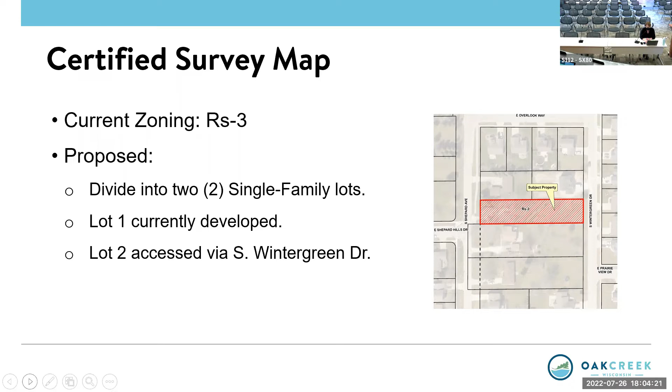On the screen right now is the proposed certified survey map showing the dividing line, creating 2 exactly equal lots. You'll notice that Lot 2 includes a building envelope. Staff is recommending that the building envelope be removed, simply because we do not know whether or not those particular setbacks are going to apply to any particular development.

At the time it becomes ready for development, it would have to comply with whatever code requirements are in place at the time. So whether it's the principal structure or any accessory structures, that 10-foot setback on either side may or may not be relevant. However, the 30-foot setback will still be relevant, so we're requesting that the 30-foot setback to Wintergreen Drive remain, but the remaining building envelope just be removed.

As a point of reference, laterals will need to be extended to serve Lot 2, and a grading plan will also be required at the time of a building permit application submitted for development of Lot 2. With that in mind, there is a suggested motion for approval for Plan Commission consideration on the screen.

The applicant is in attendance. He indicated prior to the meeting that he would wait for any questions from the commission, so we'll go right to the commission. Any questions or concerns, starting on my left with Commissioner Hannah?

Yes, I have a question. So when we divide that lot from Wintergreen Drive, are there going to be any laterals for sewer, sanitary, any utilities? Yeah, they'll have to be extended to serve the property. So there will be work on that Wintergreen Drive, right? There won't be any main required, but laterals will have to be extended to serve the lot on Wintergreen, yeah.

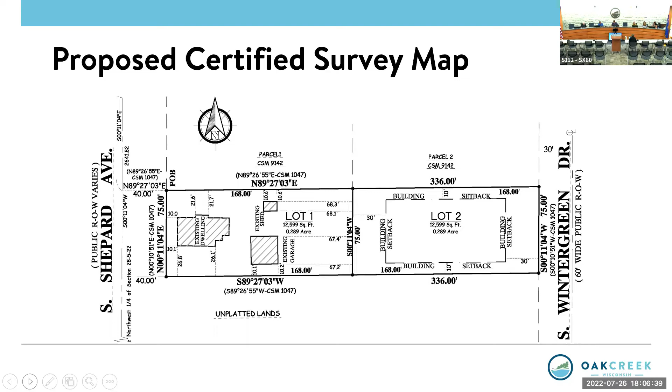Questions, please? Nothing from engineering, thank you. None for me, no questions. And I have no questions or anything to add.

So we will look for a motion on item 7A. Super moves that the planning commission recommends to the common council that the certified survey map submitted by Daniel Katona for the property at 9630 South Shepard Avenue be approved with the following conditions: one, that the map is revised to remove the building envelope and zoning district setback; the front setback of 30 feet shall remain on the map; that all technical corrections, including but not limited to spelling errors, minor coordinate geometry corrections, and corrections required for compliance with the municipal code and Wisconsin statutes are made prior to recording.

Kuzikowski will second. Roll call beginning with Commissioner Perillo. Perillo, aye. Kaczynski, aye. Lorik, aye. Kuzikowski, aye. Seifert, aye. And I, aye.

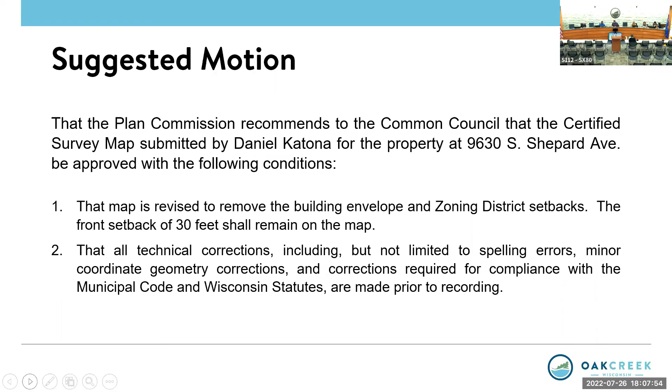That gets us to item 7B, plan review: review of site, building, and related plans submitted by Brianna Bradford, Pilot Travel Centers, for modifications to the exterior of the building at 2031 West Ryan Road.

Thank you, Mr. Chairman. This is for the Pilot Travel Center, the existing gas station, truck stop, and related facilities. There are various zoning districts that affect the property, but the part of the parcel we are actually concerned with this evening is really just the building and the trash enclosure.

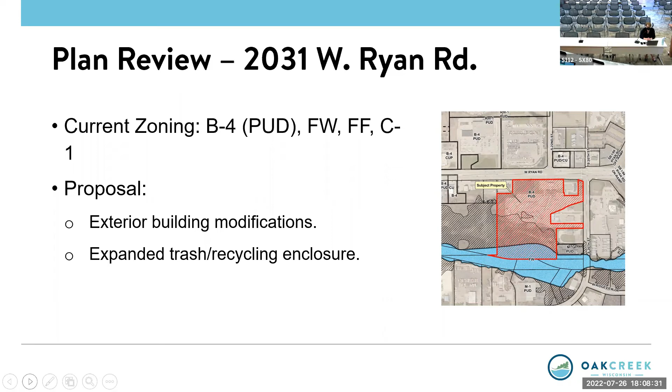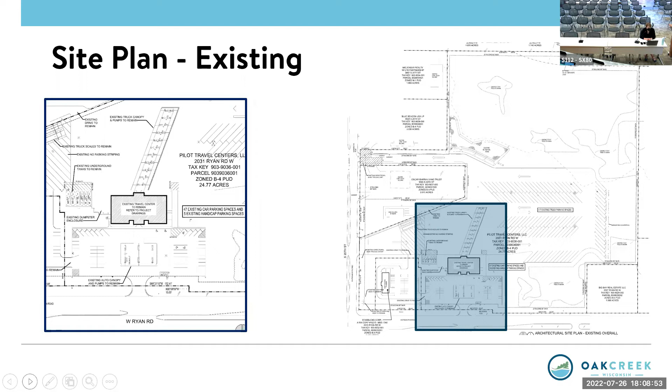On the screen right now is the existing site plan with one caveat: it is missing some of the parking and the LNG addition that was approved in 2012, but that's not in the area we're discussing this evening. Again, this covers exterior modifications to the building and expansion of the existing trash enclosure. This is the proposed site plan for that area. The trash enclosure is on the west side of the building, and the expansion will go a little bit more west and south.

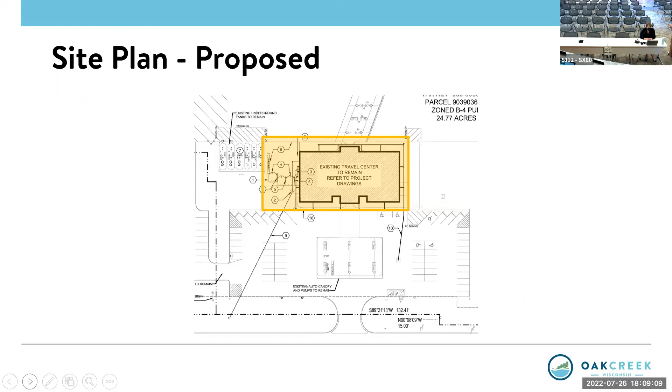The trash enclosure itself is proposed to be constructed with similar materials to the building, split face CMU in a color to match. The gates are about 7 feet tall, corrugated metal, which is acceptable per code. There are two personnel gates proposed to be about 8 feet tall and a little more than 3.5 feet wide, proposed to be chain link. Staff is recommending approval even though chain link is not an approved material for trash enclosure gates, because they're just for personnel access, not the main gate portion.

Within the enclosure itself, there are a couple of items of interest. Instead of traditional dumpsters, we are proposing to have a trash compactor and potentially a cardboard baler. Staff have no concerns for either one of those. However, we do have a concern for the proposed storage container. Outdoor storage is actually a conditional use in the B4 district, and because this is subject to historic planned unit development agreements, it may be prohibited altogether. Unfortunately, staff, in researching the historic PUD documents affecting this area, were unable to determine exactly which PUD or PUDs would apply, so we are just applying the code section here, and we're recommending that the storage container be removed right now. If in the future they do request that, it would at least require a conditional use permit, if it would be allowed by the PUD at all.

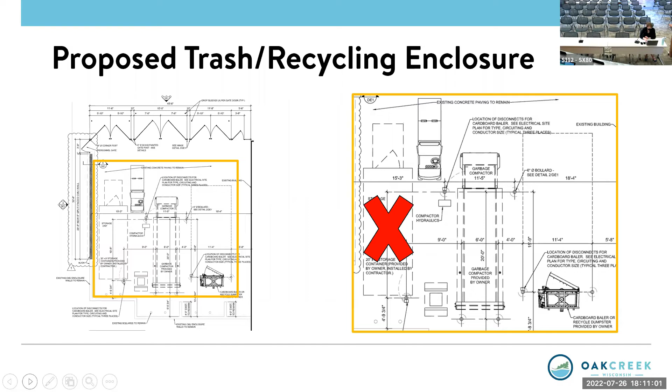On the screen right now are the elevations for the trash enclosure. The metal gates are the proposed main gates for access, and then the employee gates, which are 8 feet tall with chain link, which staff are again recommending approval.

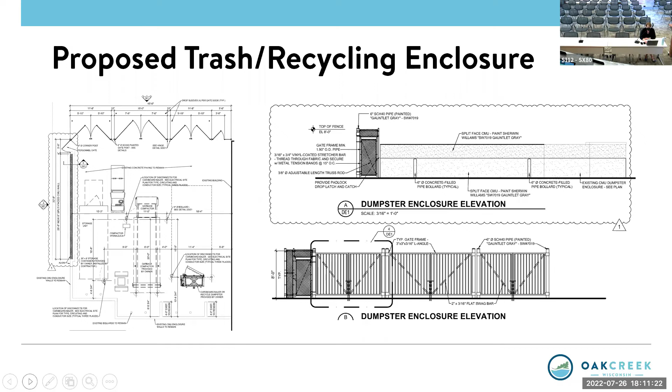Turning to the building now, we're going to go back and forth so you can get an idea of what the exterior modifications include. This is the existing north elevation, seen behind the fueling canopy from Ryan Road—this is what the actual front facade looks like. They are proposing to remove all the existing metal awnings on the building, so this is a before and after. This also includes the expansion of the trash enclosure, visible on the left-hand side of the screen, on the east orientation of the building.

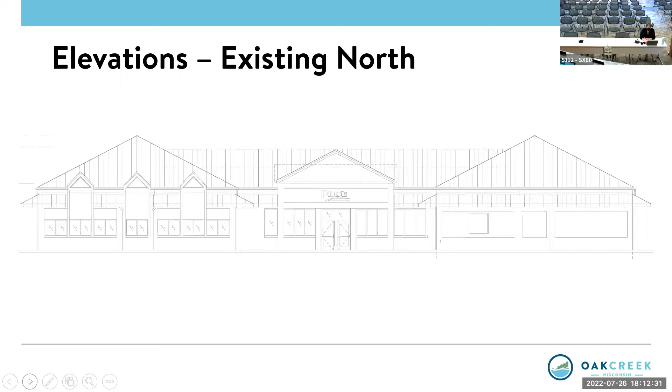They are proposing to replace the existing vinyl siding with Nichiha siding, which is fiber cement. They're also proposing some stucco infill in certain locations, for instance above and below the windows on this elevation, and in certain areas elsewhere on the elevations to the south, basically underneath where the windows were. They are also proposing to remove several windows—notice the groupings of windows that will be removed and infilled. This is part of the interior renovations as well, which is part of the reason some of these windows are being removed entirely rather than replaced. One of the windows that's to remain will actually be replaced with spandrel.

Now, even though there are signs shown on the building, signs are not part of this review. Part of the reason is we don't have the exact details. We do have some dimensions, but there are some requirements for signs that these don't meet—we don't allow cabinet signs for one, and there's the number of signs, et cetera—so we're just not including that in tonight's review. If you could kind of ignore that for now.

Also choosing to paint the existing CMU on the rest of the elevations, including the north elevation, the doors, the metal roof, and electrical cabinets, going with an updated color scheme. All other lights on all other elevations, with the exception of the driver entrance on the south, are proposed to be removed, with the exception of some gooseneck lights above the windows on the north and east, and some wall pack lighting on the remaining elevations. There are no other lighting changes to the site.

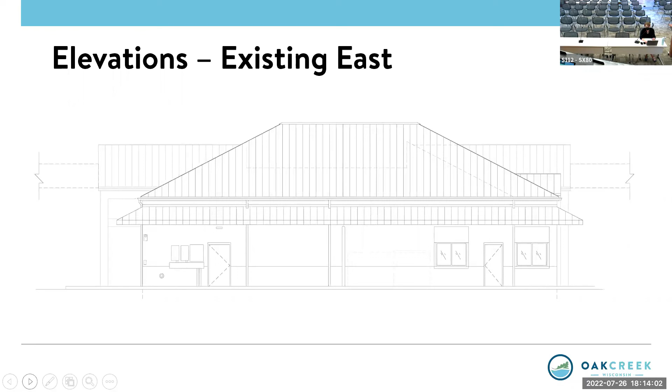Turning now to the east elevation, this is existing, but it doesn't include the existing trash enclosure wall. Keep that in mind when you look at the proposed east, which does include the trash enclosure wall. You'll note that it matches the scheme, the color, and the materials, and it just blends in.

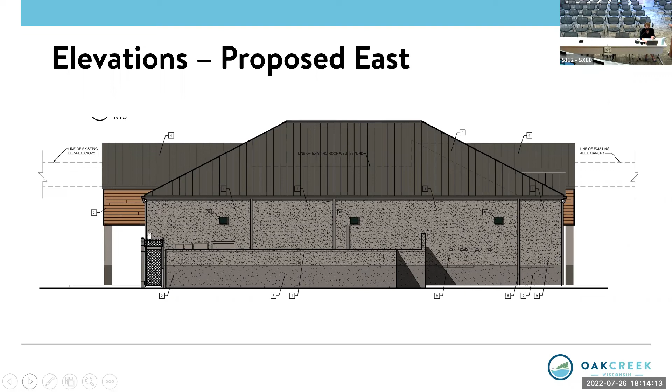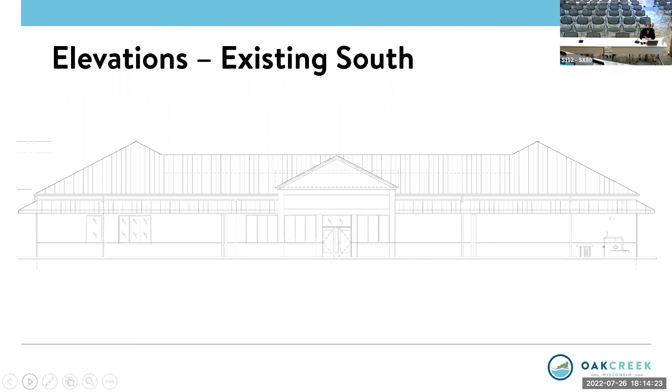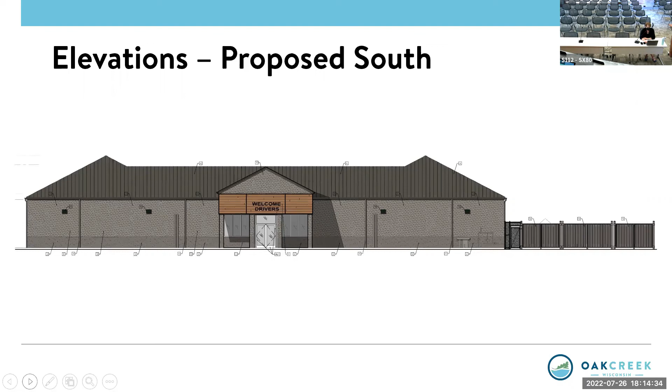This is the existing south, where the diesel canopy is. This will be the driver's entrance - I believe it is the driver's entrance right now. This is what it'll be proposed to look like. Those metal gates are the south elevation of that trash enclosure. No signs at this point.

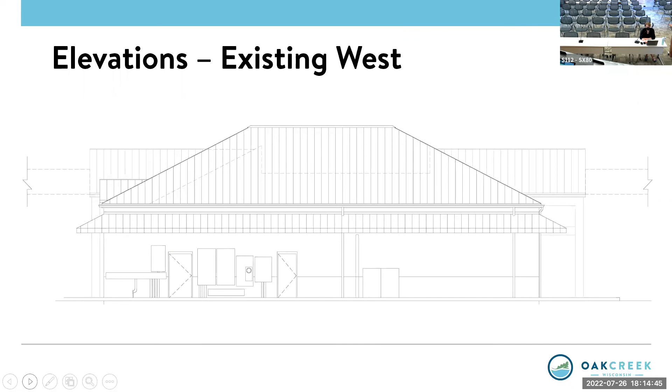Turning to the final elevation, the existing west, which faces interior to the site, there's some landscaping that extends beyond the parking. This is what the proposed west looks like - essentially removing the metal awnings and painting, and doing a little bit of infill work there.

Included in your packets, but not in the presentation, were some replacements to the rooftop mechanical units. They are proposed to be, and appear to be, pretty much screened by the existing roof element. Anything that would extend beyond that would have to be looked at and screened properly, but in terms of location and what appears right now, it does appear those replacement units will be screened as well.

With that in mind, there is a suggested motion for Plan Commission consideration with a couple of conditions.

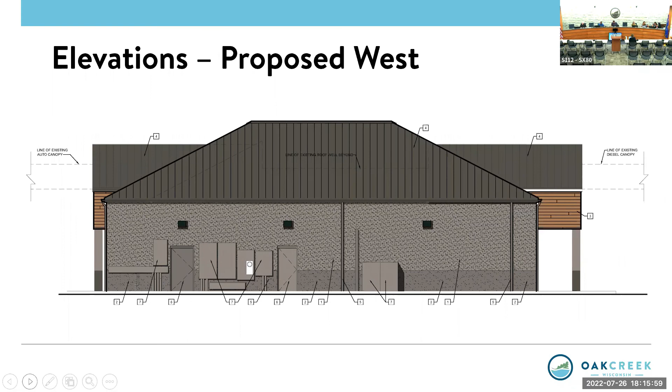So there may be some additional illumination that's just not reflected in this particular elevation rendering. The applicant, represented by Zoom, did confirm via Q&A chat that there was illumination there. Keep in mind there is a fueling canopy in front of the building that will provide additional spillover lighting, and there's additional parking lot lighting - it's just not reflected on the building. Okay, great, thanks.

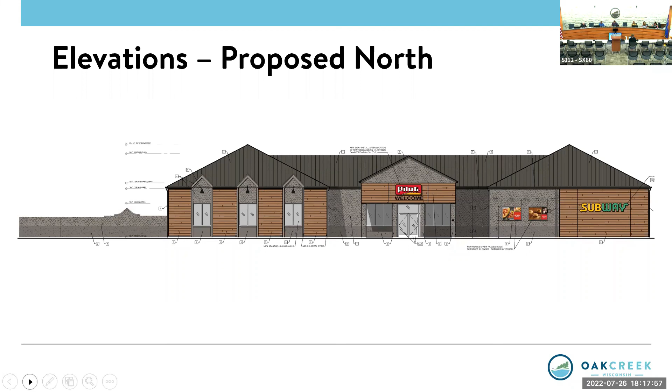I move that the Plan Commission approve site, building and related plans submitted by Brianna Bradford, Pilot Travel Centers, for the property at 2031 West Ryan Road with the following conditions: 1, that all relevant code requirements remain in effect; 2, that landscape plans are submitted in conformance with all code requirements; 3, that all light sources are shielded and directed downward, with color temperature of fixtures limited to a maximum of 3,000 kelvins; 4, that all mechanical equipment, transformers, and utility boxes - ground, building, and rooftop - shall be screened from view; 5, that all revised plans are submitted in digital format for review and approval by the Department of Community Development prior to submission of permit applications.